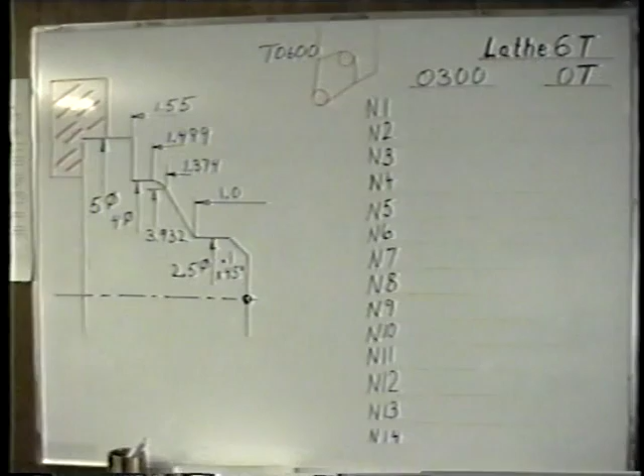Let's make this part together here, and it will be a program with very little differences that will apply to the 6T and also to the very modern OT control. What we'll do is see this part made together, and then we'll actually see the part run. Let's take a closer look at the part first.

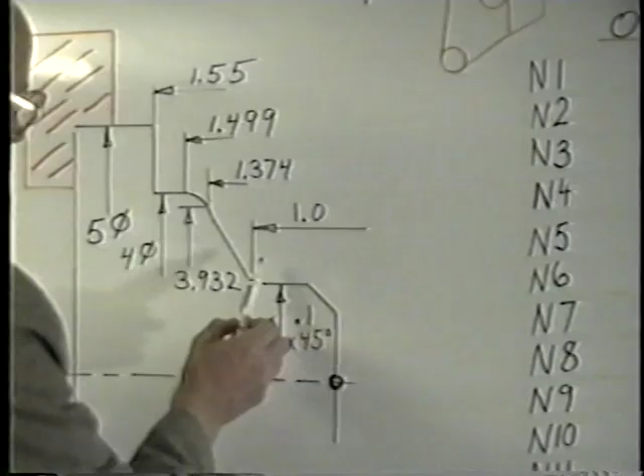Let's take a look at this part together. First of all, notice that all the dimensions are laid out coming from our face, except for this chamfer dimension, and we'll do this together. Here, we want to go to 1 inch. We would like to feed up in this direction to this intersection point where this radius blends into this angle, and all these numbers have been figured out correctly.

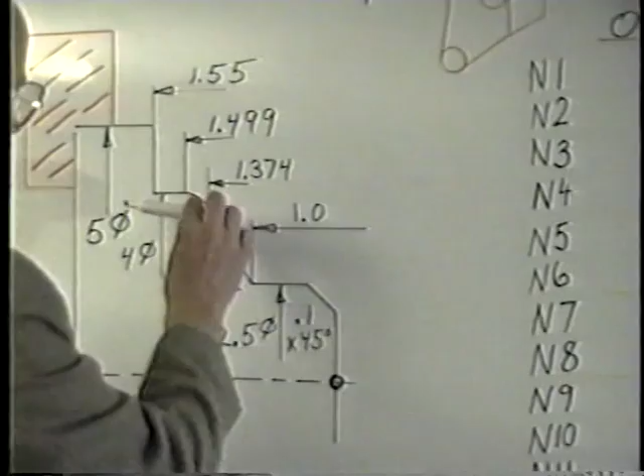1.374, 1.499, etc., same in this direction. So what we would like to do here is achieve that this tool comes down about 0.100 away from here, and we will figure out what this point will be right here. Let's take a look at that. This is supposed to be a 0.100 by 45 degree chamfer.

So if we stay 0.100 away from here in this direction, point 1 is the point to which we will rapid. That means this tangent point is dropped another 0.100 per side in the X direction. To begin with, the piece is 2.5, and if we take off the 0.100 per side, then this actual dimension here would be 2.5 minus 2 times 0.1, or 2.3.

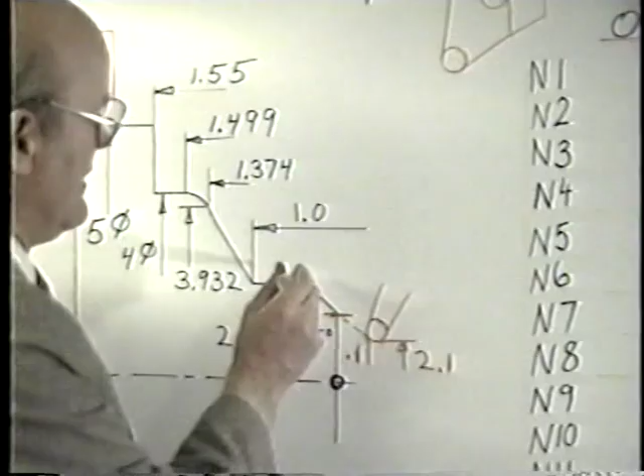Now there's another 0.100 here per side. That makes this 2.1. So we will rapid to 2.1 by 0.100. This dimension, of course, is the 0.100, so this dimension will be 0.1.

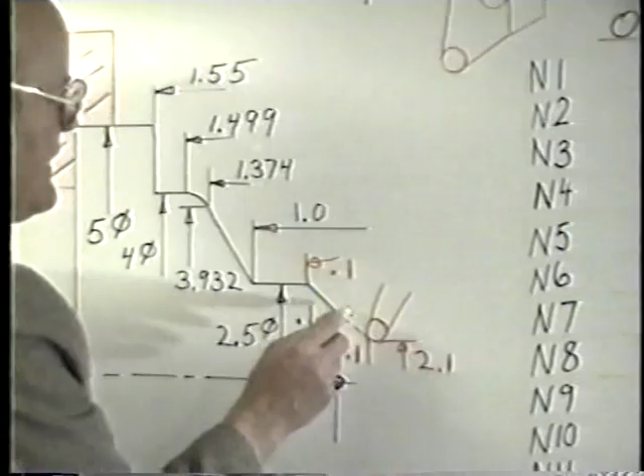Then we will be in cutter compensation when we get to here. We will feed to here, then from this point to here, and cutter comp will get us tangent to this angle. Then we will just feed straight up to this, and cutter comp will set the tool properly here.

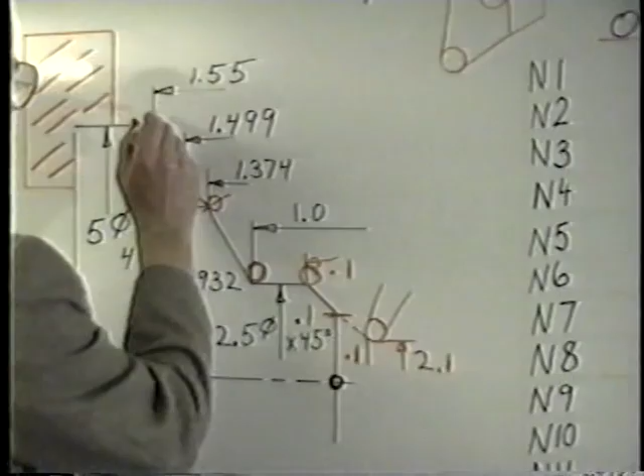Then we'll cut a radius going around to here. We will then go straight to here, and then feed off our part to here, and we'll rapid away. Now we'll go through the whole program together. When we're all done writing this down, we will then see this program actually cut. Let's do that.

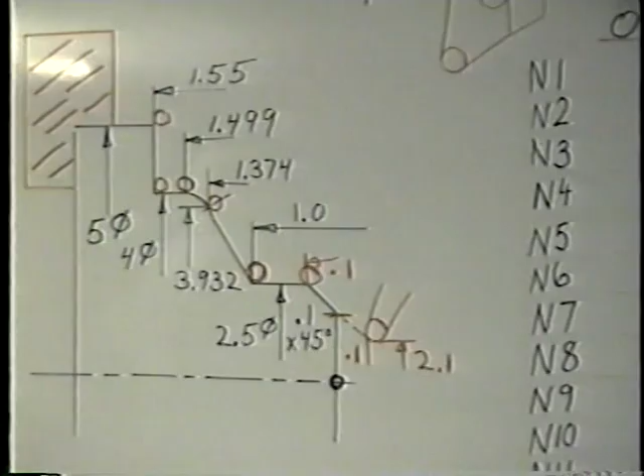The first thing we would have on the modern machines is a program number O300, the letter O followed by up to a 4-digit number. So 300 is fine for either the 6, the 10, or the 0. It's the same for all of them.

And what we usually have in our first line here is a G50 code. It would look like this: G50. Now on the 6, on the 10, we would then put in where this tool is sitting as a diameter value, just like we did on the 5T. Let's assume this tool is sitting at 6 inches in this direction.

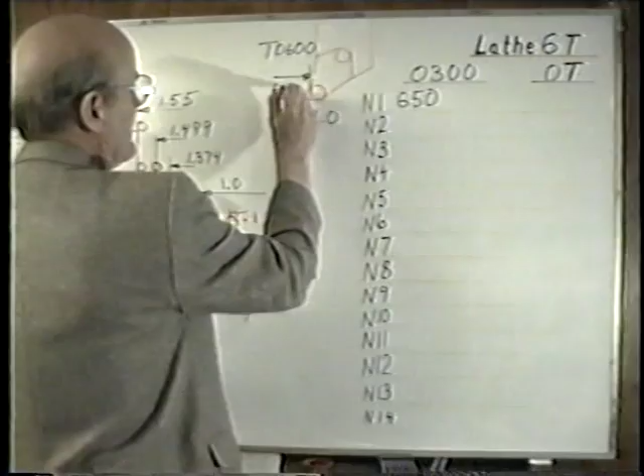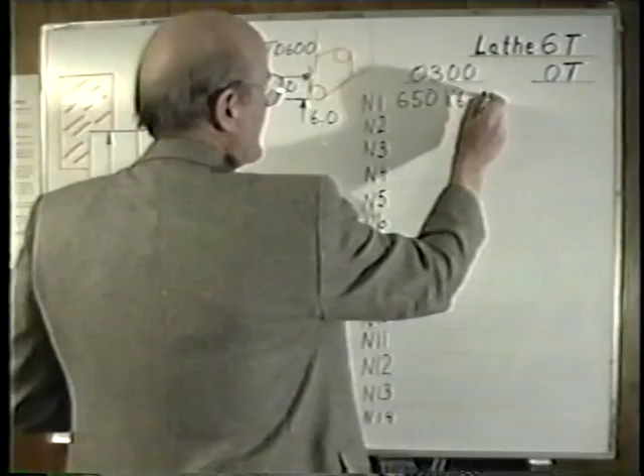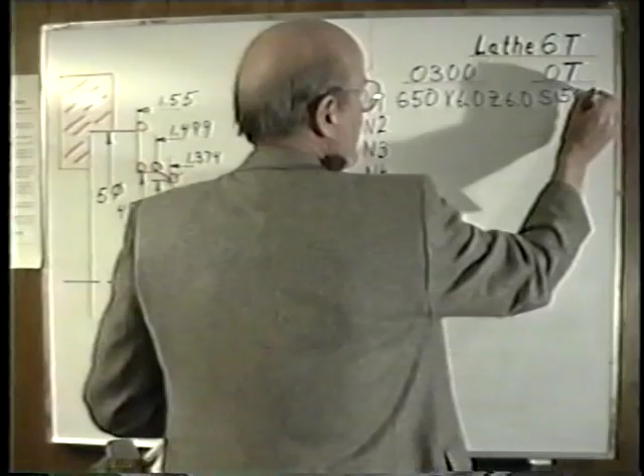That would be the distance from the finished face of our part. So we would show that by saying we're sitting at X 6.0 and Z 6.0. And in the same line today, there is a limiting speed, S 1500, or whatever you put here, which would mean that during the cycle of this part, we do not want to run any faster than 1500 RPM. This is a limiting speed that's actuated by the G50 code.

Now the difference would be that on the 6T, we are programming where this is located. On the OT control, this is not necessary, because this would be handled in something called coordinate system setting, where we actually dial it into our coordinate system.

This method will work on all controls—the 6, the 0, the 15, all of them. But in order not to program it, we must have this option that's only on the OT control.

So we just told it where this tool is located. Next, we'll tell it what tool we'd like to use, T. What we usually do is put in this tool number, 0600. This would be the position on the turret without an offset assigned. We will assign this offset a little later, and we'll see how we change this.

Into this same line, there could be a gear range. A machine, when it's very small, typically runs straight off our DC main motor. But as it gets a little bigger, there might be a high and low gear range. This would be one of the gear ranges. In the example later, we will see a gear range.

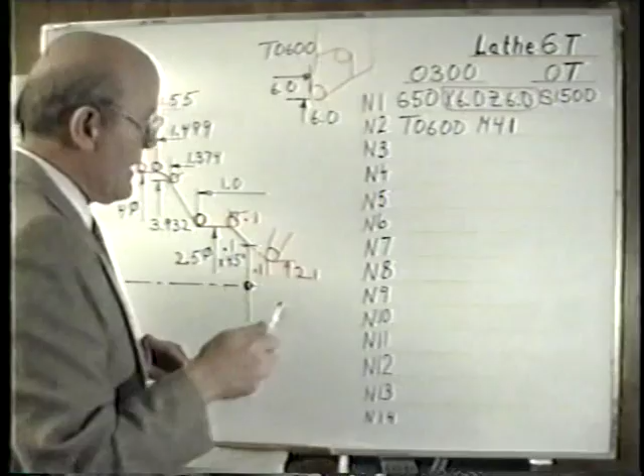Now we're going to tell it how fast we would like to run, and we do it like this. This means we are programming in constant surface feet, and this is the value of the surface feet, 650. This would mean we're asking this control to figure out its own RPM all the way through.

Now as we start cutting on a larger diameter, we're going to hear it slow down, and as we go toward center, we would hear it and see it speed up. Also in this line, this would actually turn the spindle on.

So right now, the control knows where the tool is, it knows what tool it is, and it knows how fast to run. In the next line, we would tell it that we would like to rapid somewhere, G0.

And into this line, we tell it that we want to use cutter compensation. This means cutter comp to the right. We'll talk about that later. Cutter comp right and left—this means to the right.

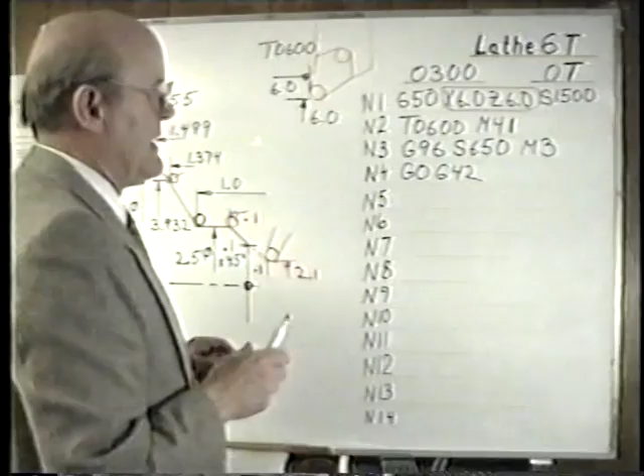That as you're looking at this tool in the direction of its travel, looking from behind the tool, picture yourself looking from here. This tool is to the right of a workpiece. That's what G42 means, as opposed to G41, which would be left.

And this is all set on the way now to this point right here, which is located at X 2.1 and Z 0.1. That is this point right here.

And into this line, we also put the fact that as we're doing all this, we put in our tool offset and repeat our tool number, T0606. Now we're not going to be using coolant.

This could also be the line where you actually turn your coolant on. So we're here now, and we have asked the control to look at the shape ahead of itself and figure out cutter compensation in this direction.

Now we're going to start cutting by saying G1 to this point right here, and we just put the actual dimension in there of X 2.5 and Z minus 0.1.

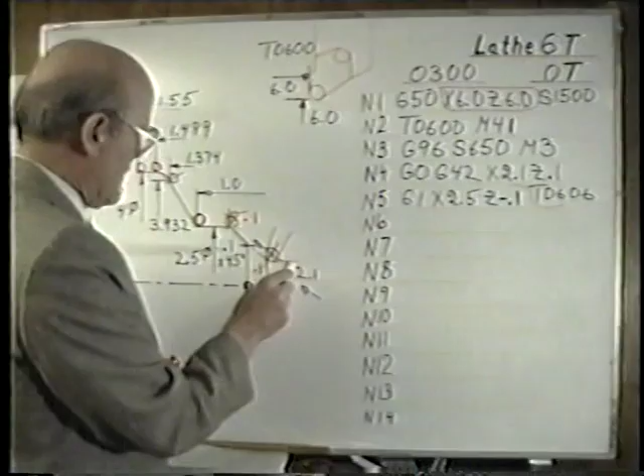Remember that this goes with the upper line. So we're now in this position, but into this line right here, we need to put a feed rate. And the feed rate would depend on what kind of surface finish we're trying to achieve here. A combination of spindle speed, feed rate, and the size of this tool would give us our surface finish.

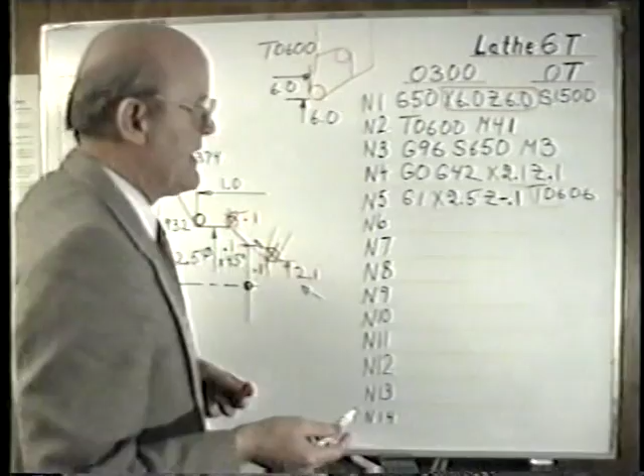We are going to be feeding at approximately 10 thousandths per revolution, F.01. Now, notice every number is written with a decimal point. Where before on the older control, we had to write all the numbers out in tenths, here we don't have to. That's one of the advantages of this control, the newer controls.

Here we have a program number, so we can have a whole number of programs in a library. We have decimal points all over. We have constant surface feet, and we have nose radius compensation, which means we don't have to figure out all these extra calculations.

So we are now sitting in this position, and now all we would do here is say go to Z minus whatever this position is, and the control would figure out whatever is necessary to get a tangent to this angle. We would say 1—that's this, 1 inch, that's all.

Now, angle going up. We have figured out these dimensions very carefully. This is the X dimension and this is the Z dimension. So here we're going to say go to X, 3.932.

Z minus 1.374. What would happen now is that we feed up in this direction.

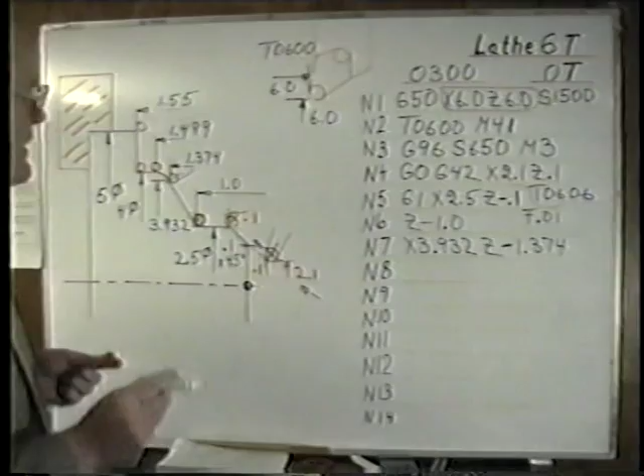Control would look ahead to this radius and make sure we're sitting in the right relationship to whatever is coming up. Now here's how we program this little radius. It's either a G2 or a G3. Now this would be a G3.

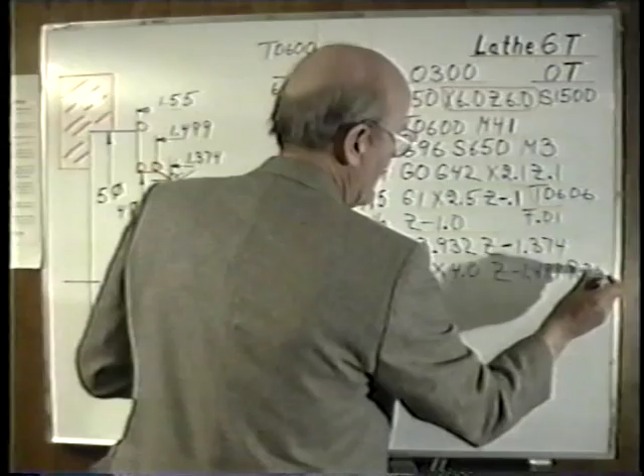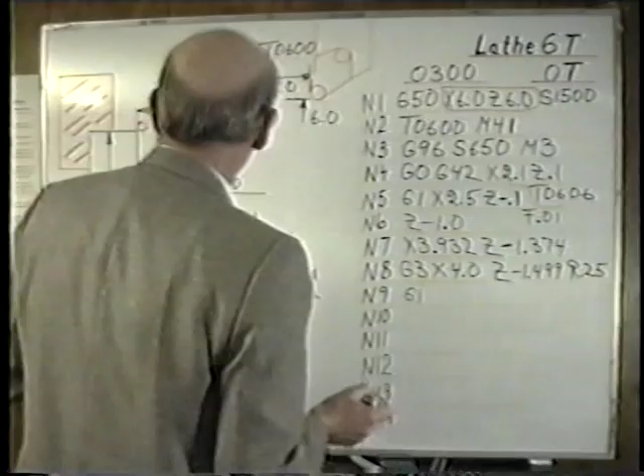Now we have a straight line going back. That would be this line right here, G1. That goes back to Z minus 1.55, which is this wall back here.

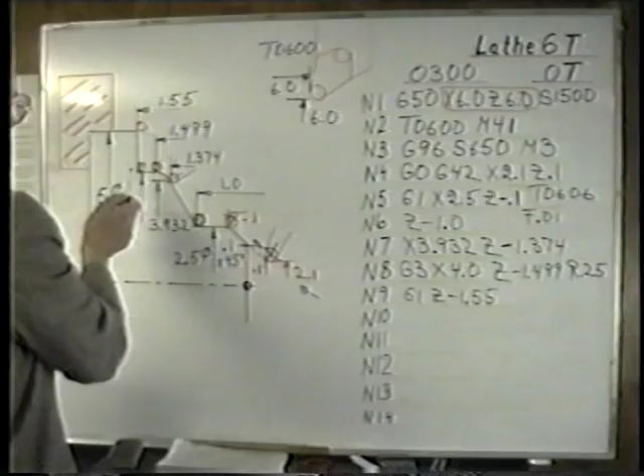Now all we have to do is face straight up along this wall to a point larger than this OD. How about if we go to X 5.1, and we would be above this work part right now.

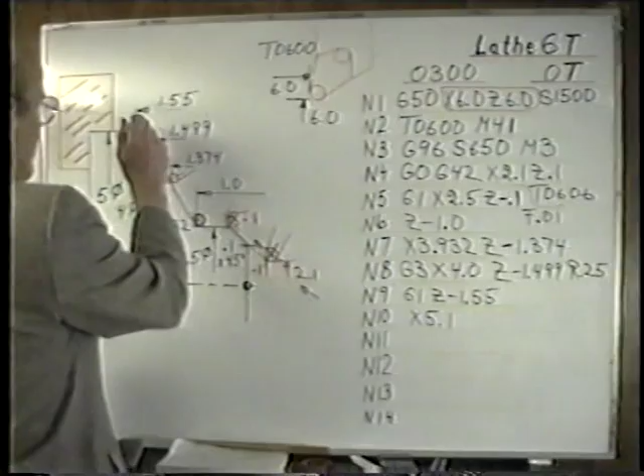Okay, we're finished. Now here's what we would have to do on the OT, on the 6T. If this is the 6T control, we would say rapid, and we would say G40.

And now, on the 6T control, we have to make sure we go back to where we came from. We go back to 6 and 6. And at the same time, we take off our tool offset by saying T0600. So we're canceling cutter comp. We're going back to 6 by 6.

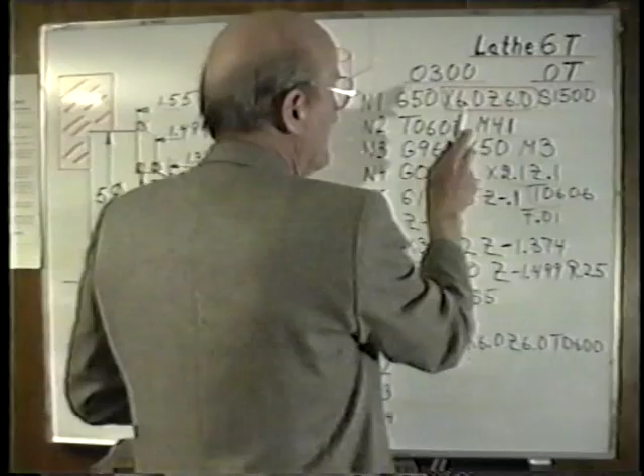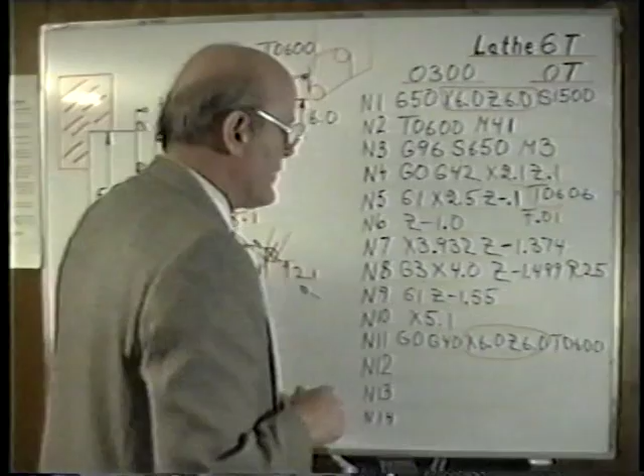And now we're on the 6T control. We programmed our initial starting point. We're now going to be programming where we go back to. And on the OT control, we could really go back to any place we want to, because coordinate system setting will watch where we came from and where we're going. Outside of that, it's the same program.

And we are finished. So in this last line right here, we could just say M30, which means end of program. And what would happen is it will go from here all the way back to the beginning, and we would be ready to run this part all over again.

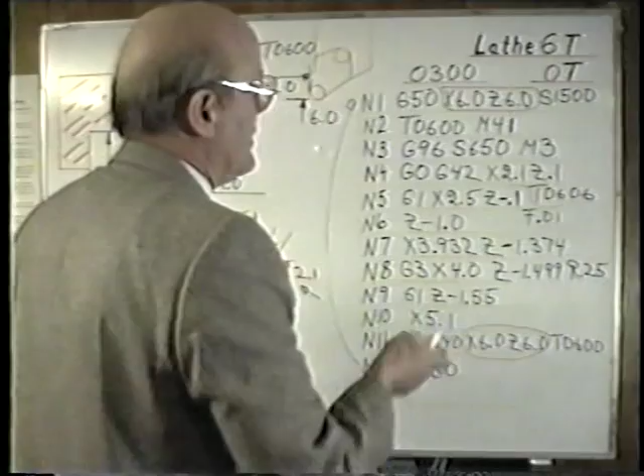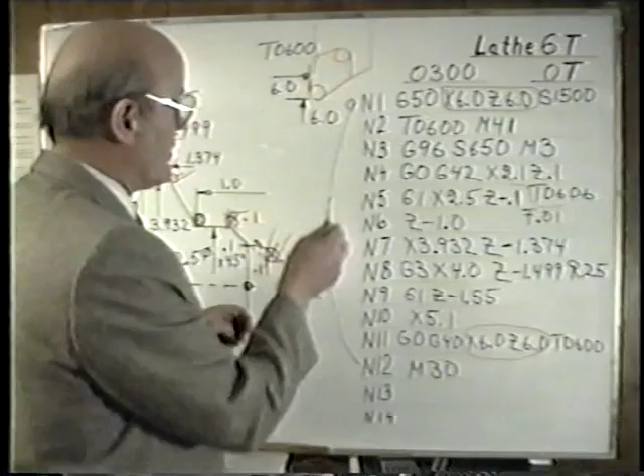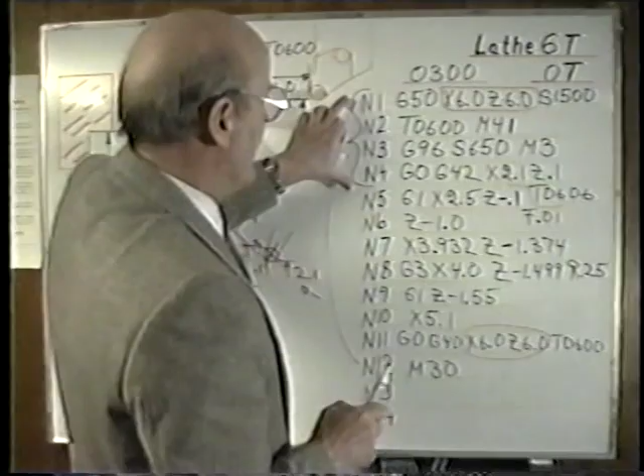So what we have now is a combination of things in this little program. A typical program start. For any tool that we start, whenever we go to a tool change, we would have 4 blocks that would look like this. A G50 line, a tool line, a G96 line, and then going to the point where we want to do something. Then the cutting sequence itself would be dependent on what kind of part we're going to make. In the end, though, we would always go back to some point away, take out our tool offset, and if we're using cutter comp, we would take that out, and then we would just stop.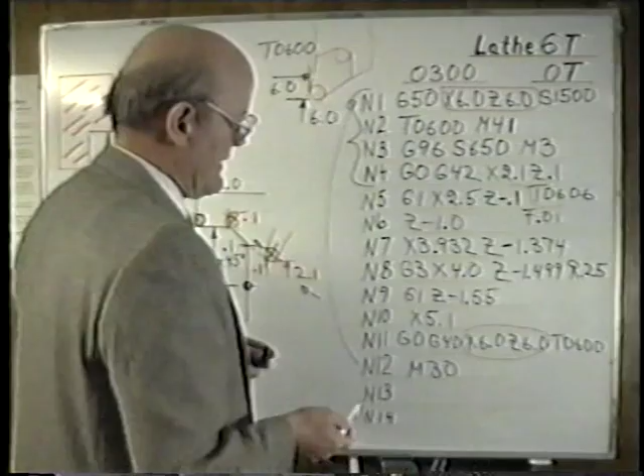Okay, there's a typical programming example for a 6T or an OT, and what we'll look at right now is an OT control actually cutting this part, and we will make some minor changes in that part. We'll probably change the tool offset in that part.

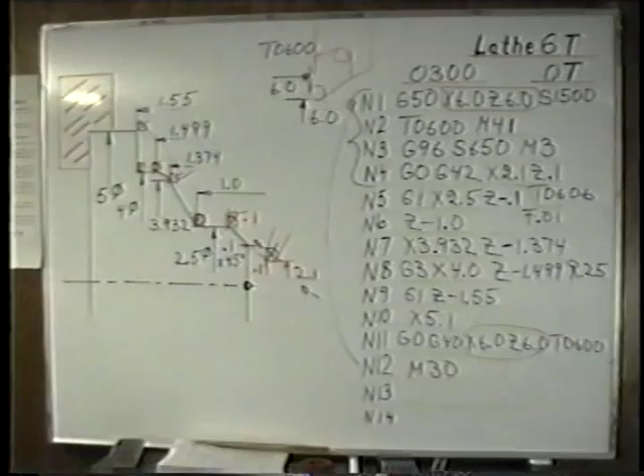Let's take a look at what a finished cut would look like on this particular part here. What we'll do after this, we'll go and edit some of the values to change our feed rates, to speed up the surface feed, to try to improve the part and to use tool offsets, etc.

This is a piece of mild steel, and we're running somewhere around 550 surface feet, and we'll speed that up in a little while.

That whole sequence didn't take very long, and we'll check out how long it took, and then we'll see if we can improve it a little bit.

On our position screen on this particular machine, there is an option that tells us how long the cycle time took. And in the lower right hand corner, you can see that it took 32 seconds to do this last sequence. What we'll do is we'll change some of our values around and see if we can improve that a little bit. Now this was a finished cut, so it didn't take very long to begin with. We were already running quite fast. But let's see what our program looks like.

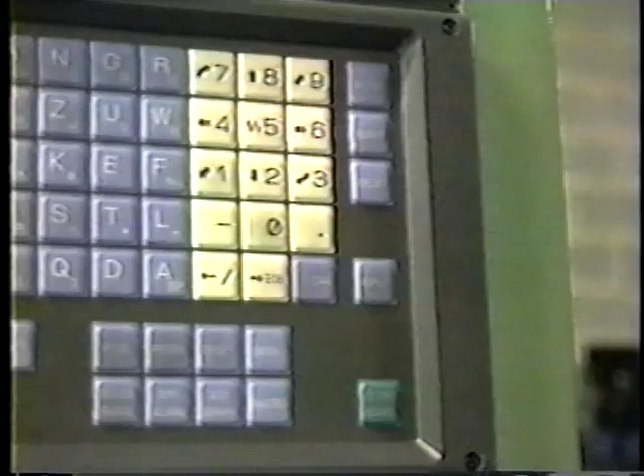To get to the point where we'd like to edit, we use the cursor down button that steps through the values one step at a time. Then we change our values by inputting a new value through the Alter, Insert, or Delete keys, upper right hand side of the control. They could be in different positions on different controls, but you will always see an Alter, Insert, and Delete key, and a keyboard that looks a lot like this.

You would see a cursor up and down. Below that is a page up and down that would change the whole page of your program. But what we'll do is go through our values using the cursors and then change some of them.

Now this is the program that's just made this part. I'm in edit, and I will use my cursor to step through this program. I'm going cursor down right now. I first have to open the program protect switch, then I step through it.

The method is to step through one step at a time like I'm doing right now, or step through to a known value, but what I'll do right now is go forward to our surface feet. Right now we're using 550 surface feet. I'll touch S650, alter. Open the key, alter that number. It is now 650. I'll go a little further forward in our sequence.

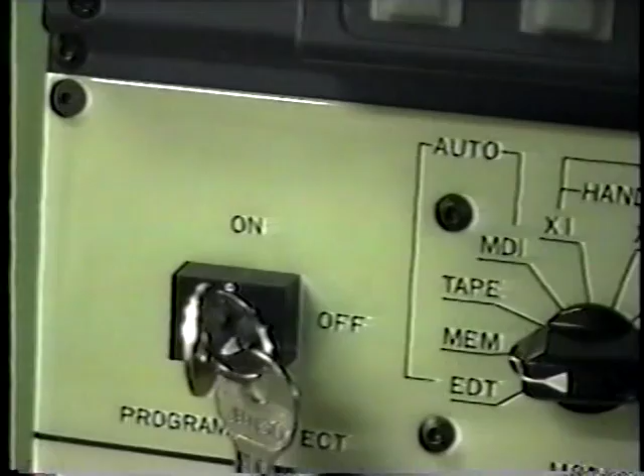At the bottom of our program screen, there are a number of different buttons. There's one for program, current, next. The one that's most useful would be the program check screen.

What that will do is show us a number of different things. It will show us 4 lines of our program. It will also show us our absolute dimensions, our distance to go. It will show us our spindle speed, and a whole number of other things.

So that's the one we usually end on when we actually try a program. Now once you're running parts, it makes no difference, but when you're trying it, you'd like to see what's supposed to happen, and the distance to go here is very important.

Let me give you an example of what the distance to go is really for. I'm stepping through our program right now. I'm in single block, so every time I hit start, it moves one line. It goes to the first G50 line, it reads the tool line, it will start the spindle right now. And in this line coming up is the line moving toward our work part. I let it go part way and then stop.

Okay, I interrupted the cut. What I want to do is compare where we are to our distance to go screen. Now the distance to go says that in X, we have no distance to go, and in Z, there's about 1.3 inches to go.

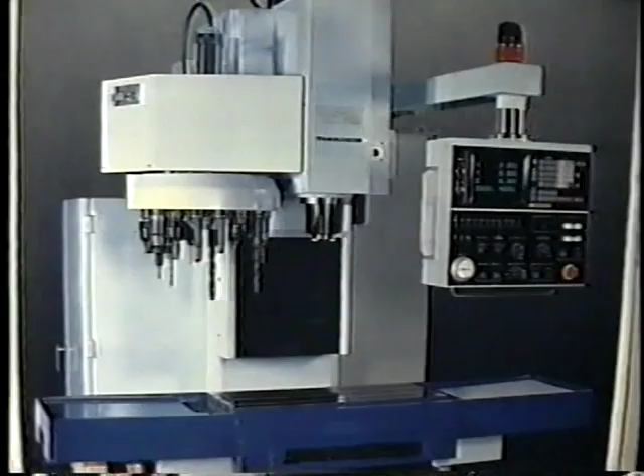The next thing we'll do is look at a typical modern CNC machining center and a programming method for a machine like this. The first thing we'll do is take a look at the tool change mechanism on this.

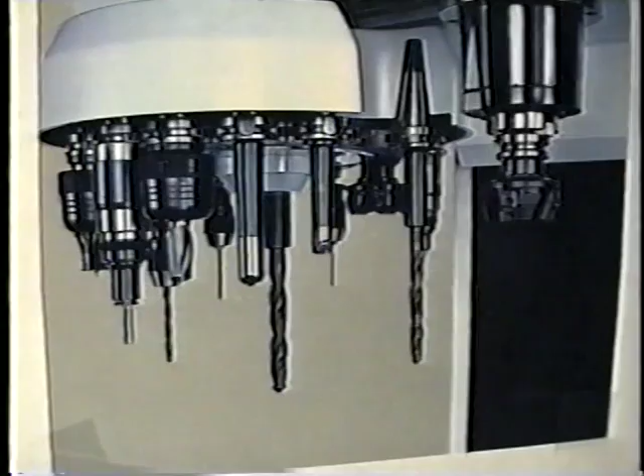This is what's called a simplified tool changer today. You notice there's a tool in the spindle and the station facing the spindle is open, because this type of changer will always put the tool away first before it rotates around and puts another tool into the spindle.

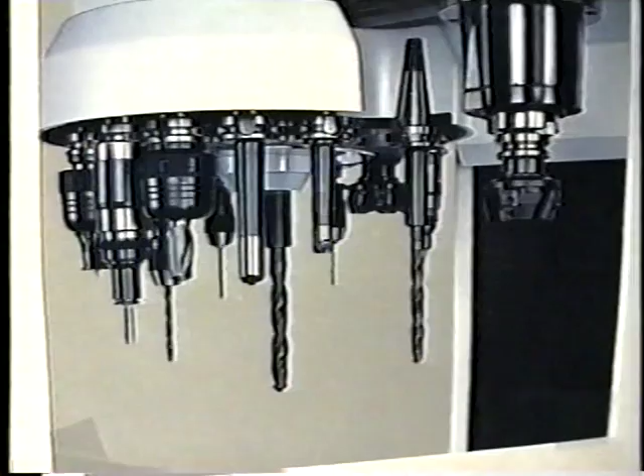We have a variety of tools. There's a face mill in the spindle, there's some drills, several boring bars, some taps, some end mills. The way we would program this is to call for the tool number with a T code. It would say T1 M6 to actually change the tool.

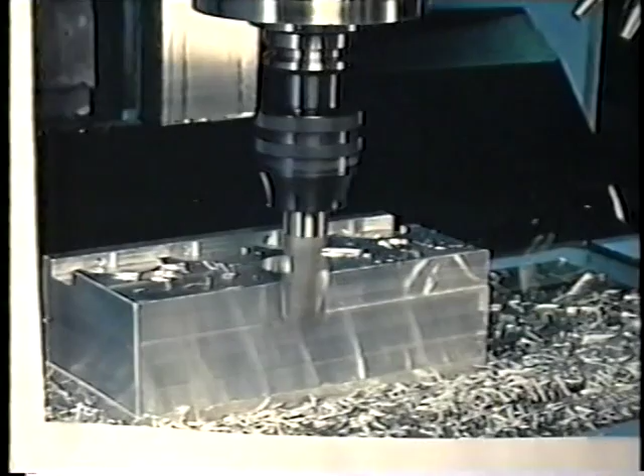Many of the skills we talked about earlier, for instance figuring out the RPM and the proper feed rate, would apply to a milling machine. This is a piece of aluminum, and we would have very high RPM, and it would be very important that we have the right feed rate, along with knowing that we normally use a 2-flute end mill for something like this. So let's take a look at a programming method for the modern CNC milling machine.

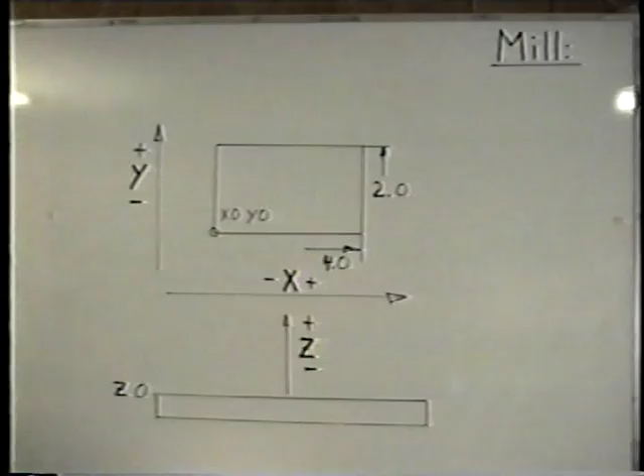First of all, let's take a look at the typical coordinate system. This would apply to a very much older machining center, an older CNC mill like a Bridgeport with a control on it, and also a modern machine. That sideways direction is always called the X direction, and this is positive and this is negative.

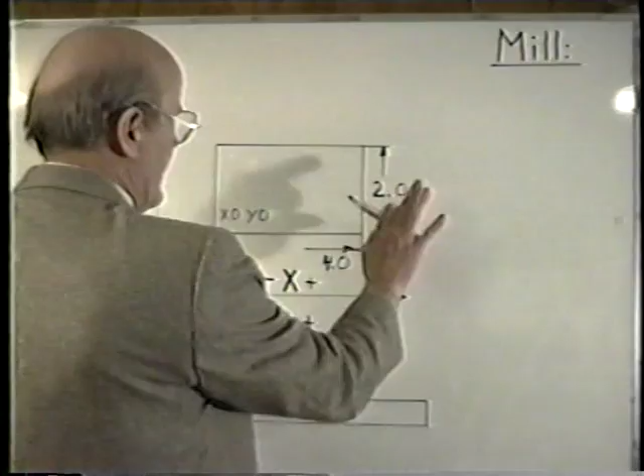In this direction, somewhere along our part, we decide where we want to start counting, and what we try to do is count from the lower left-hand side of our part, because then all our numbers will be positive in this direction. In and out is always called the Y direction.

The numbers get larger, the numbers get smaller, and we do the same thing. We count from here because then everything inside a part is in a positive direction.

Up and down on a milling machine is called the Z direction. The numbers get bigger and the numbers get smaller. They get bigger the further we travel away from our part, and the closer our tool gets to the top surface of our part, the smaller the numbers get.

What we try to do is establish through tool length compensation that the top of our part will be Z0. So any dimension of a tool above our work part, let's say this is a drill, and if this actual dimension is 1 inch, we would call that Z equals 1.0.

Once we get down to here where we're actually touching our work part, this will be Z0, and anything that goes into our work part, like drilling a hole into our work part, would be...